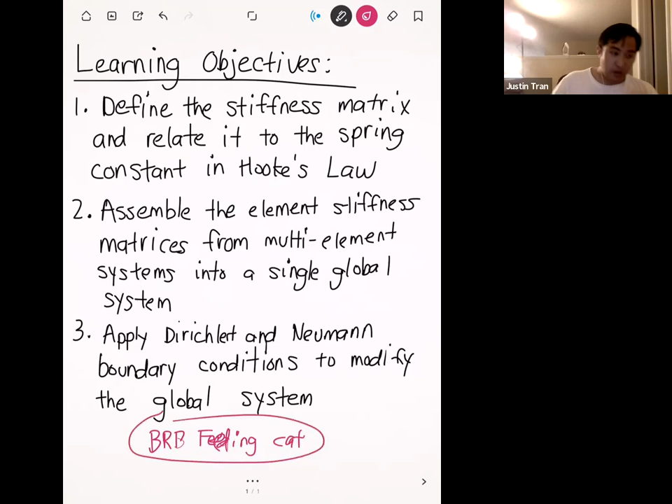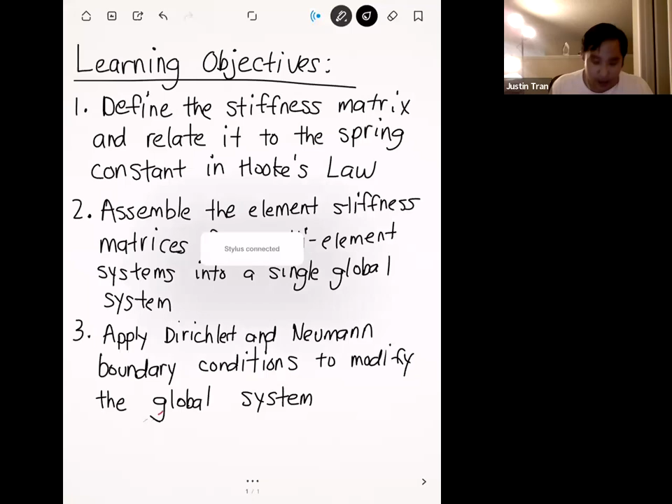All right, let's go ahead and get started. The topic for today's lecture, which is going to be the broader topic for the next few weeks up until the first midterm, is the direct stiffness method.

Let me start by saying that what we know as the finite element method or finite element analysis, there are lots of different ways that you can implement that.

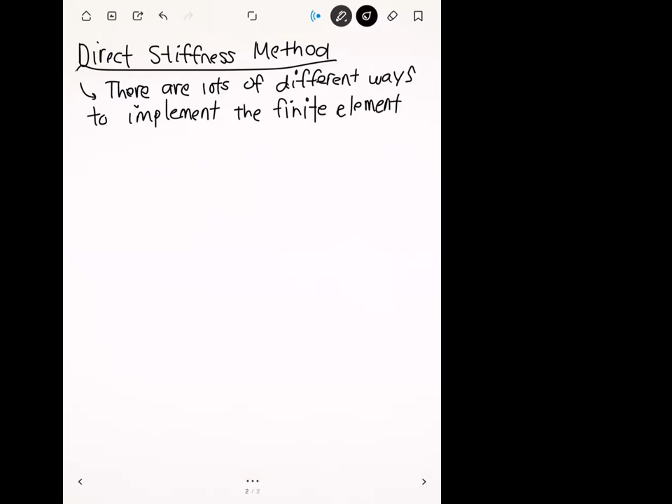If you can hear that, don't worry, my cat's not dying, she's just doing her post-dinner yowling. But she's fine, I'm not abusing my cat, I promise. That just makes it sound suspicious, Professor. Well, you're free to believe what you want. I'll bring her at the end of lecture, just because this will be the last time I'm at home, so probably the last time we'll get to see her, so I'll bring her at the end just to show you she's fine.

I think this fact is surprising to people, because when we think of the finite element method, you think it's just one method, but the finite element method actually refers to a lot of different methods to implement it. So it's more of an umbrella of methods, and we're going to talk about a few different ways to implement that. We're going to start with the direct stiffness method, which I think is a really good starting point, just because it's the most physically intuitive way to start this, and it illustrates a lot of key concepts I want to keep moving forward.

Okay, I will say though, I want to be upfront and honest with you guys that the direct stiffness method is not one that's actually used practically in a lot of codes. If you looked at the source code of ANSYS, you will see that there's no direct stiffness method in there. So it's not really a practical method in the way that it's used to actually solve practical problems. There's no commercial codes that implement direct stiffness, so it's more of an educational kind of method. But I like to start off with this in class because I think it illustrates a lot of key concepts, and it builds us up to some of the more sophisticated methods we're going to look at at the end of class.

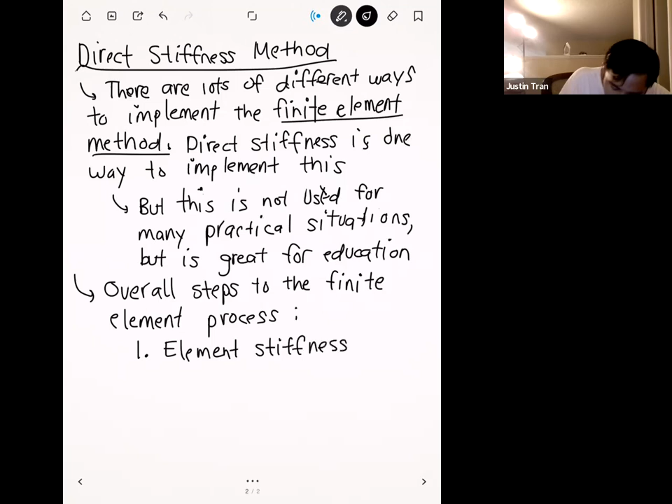There are three main steps I want you guys to focus on, and we're going to continue doing these three main steps even when we start to do some of the more complex math. Number one, the first step is to compute all the element stiffness matrices. I know none of this makes sense now, but it'll make sense later. I did want to list out the steps here because they are important. Step one is to compute all the element stiffness matrices.

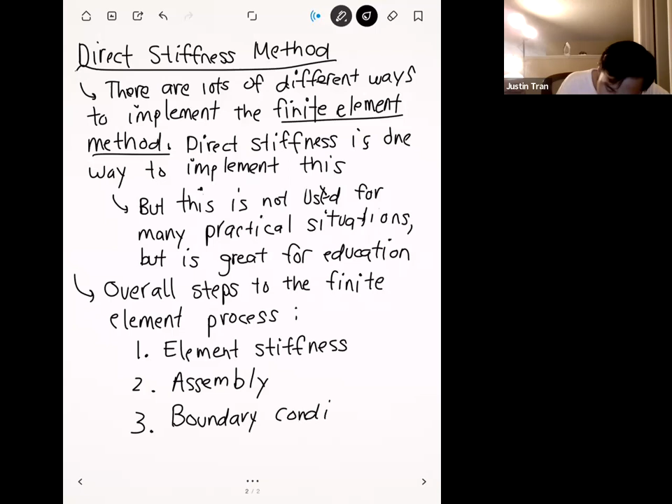Step two is a step called assembly, which we'll go over later today. Step three is to apply boundary conditions. And step four, which is kind of not really a step that we'll focus on too much, is the actual solution - how to solve that. So those are the four overall steps I want you guys to focus on from this unit, and I'll highlight what those steps are and what they all mean as we go throughout the lecture today. Any questions on this so far?

Okay, so let's start with the first step, which is the element stiffness matrix. For now, I'm just going to call it the stiffness matrix. To motivate what the stiffness matrix is, I'm going to pull in something from elementary physics. Hopefully you learned this from your first physics class, no matter how many years ago it was, but hopefully it should ring some bells. What I'm referring to here is Hooke's law for springs.

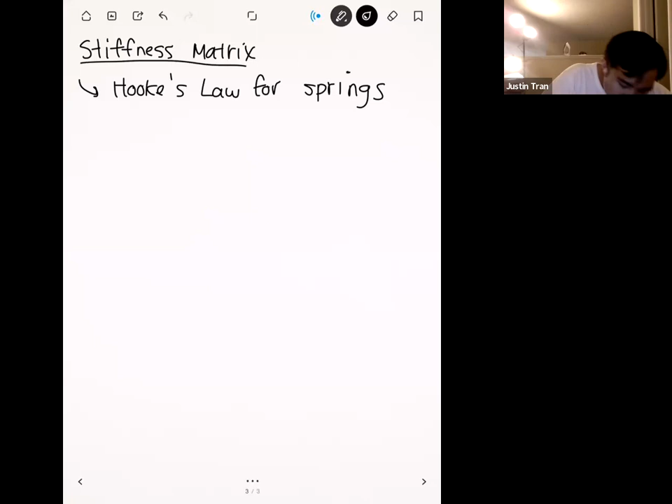All right, so what Hooke's law basically says is that if you have a spring, I'm going to attach the spring to a wall, and if you pull on the spring with a force F, that F characterizes how strongly we're pulling the spring. If the spring had an original length L, which is its resting length, we intuitively expect that when we pull on the spring with force F, it's going to lengthen by an amount we'll call D.

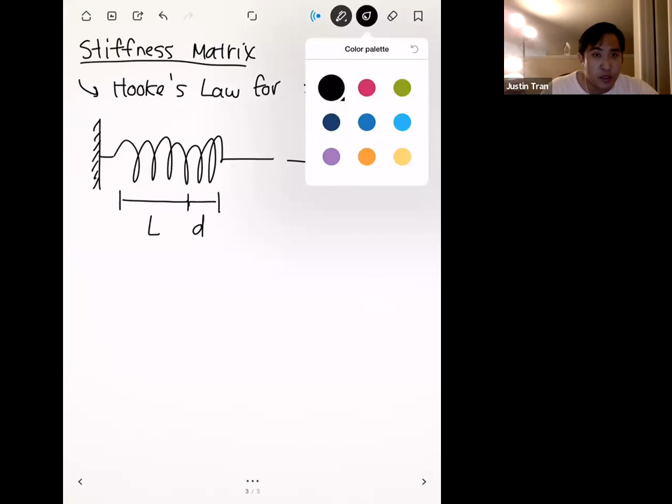So we can form a relationship between the applied force and the resulting deformation. What we say is that the applied force on a spring is equal to the resulting deformation modulated by a property of the spring itself. And if you recall from your physics classes, every spring has something called the spring constant K. So K is the spring constant, F is the applied force, and D is the displacement or deformation of the spring.

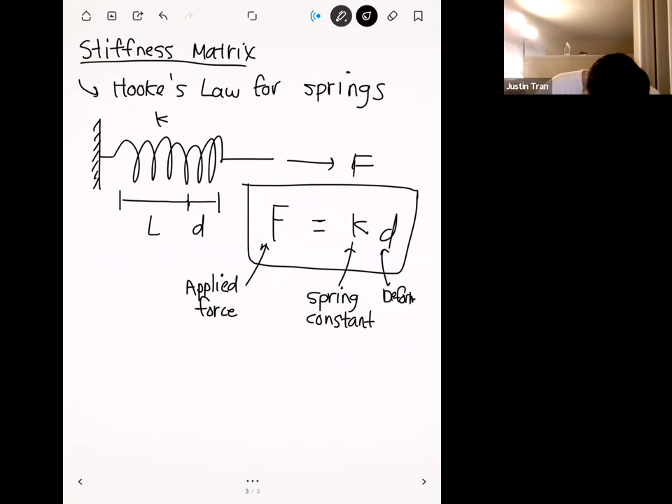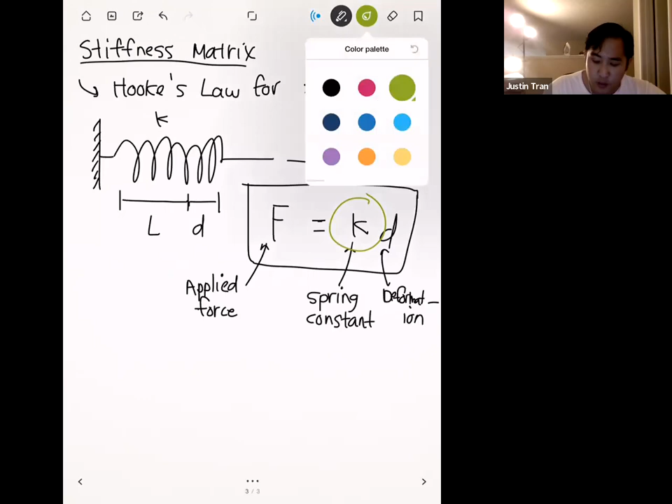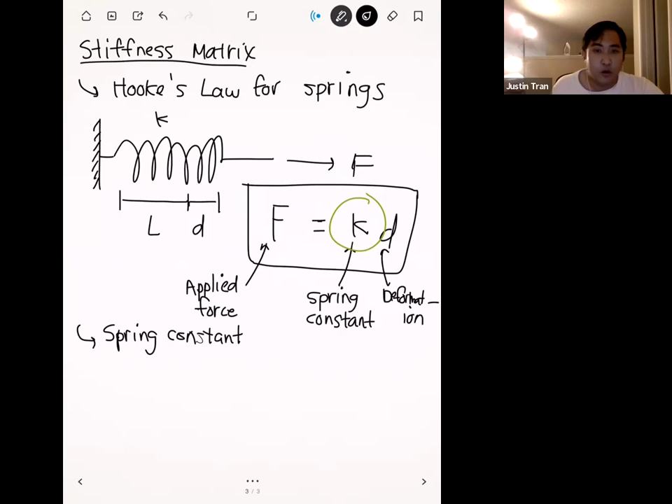Deformation, okay. So I want to talk about the role of the spring constant here, because that's kind of key to understanding what the role of the stiffness matrix is. In this very simple equation, the spring constant plays a very important role, acting as a proportionality constant, or you can think of it as a conversion constant that relates the applied force to the deformation.

So what the spring constant tells you is that for this particular spring, if you apply a certain amount of force, then it's going to give you this amount of deformation. Another thing I want to highlight about the spring constant is that it's an inherent property of the spring itself.

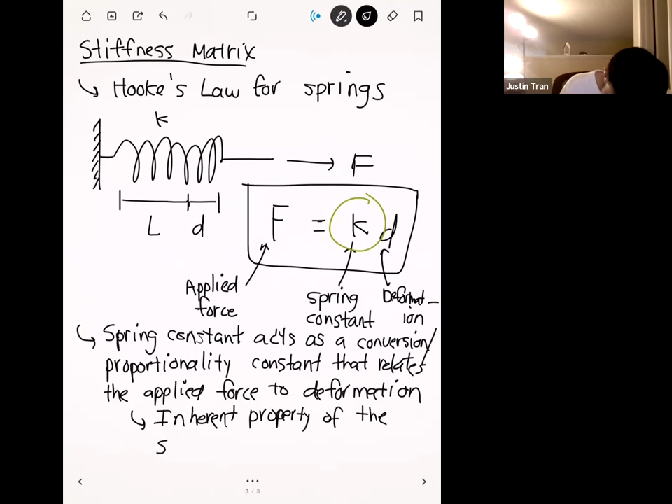The spring constant does not depend on any external factors. I know technically speaking something like the spring constant probably depends on temperature, so if you heat up the spring to a certain degree the spring constant is going to change, but we're going to neglect all that. We're going to assume the spring constant is inherent to the material and won't change. So if you ask the spring on Monday, on Thursday, when it's taking a bath, when it's just chilling on the deck, the spring constant is going to be the same because it's inherent to them. It's the spring constant is the spring constant.

So what this very simple formula tells us is that when you apply external forces to a physical system, the properties of that system that are inherent to it, the physical properties, the geometrical properties, are going to determine how that system responds or deforms in response to those external forces. I know it kind of feels like I'm making a big deal out of a very simple equation, but that understanding is going to be key to understanding what the stiffness matrix is, in terms of what role it plays for our finite element method. Any questions on this so far?

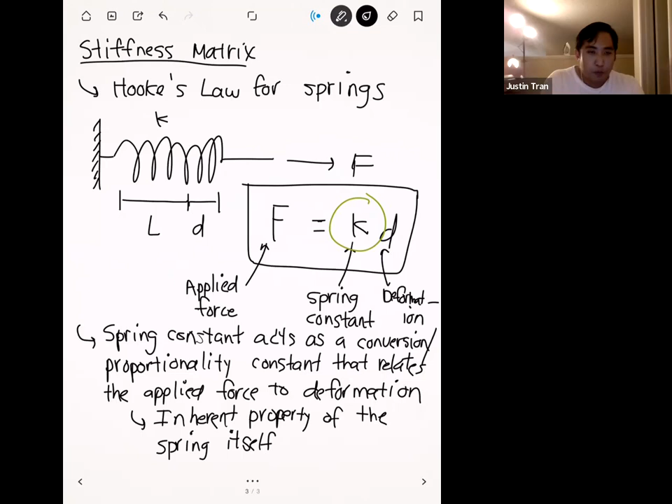All right, so that's Hooke's law for a spring that's attached to a wall. But let's generalize this a little bit. Instead of the spring being fixed to the wall on one side, let's change it so that both ends of the spring can deform.

Professor, so with this spring example, are you basically saying that our stiffness matrix is going to be the regulator between our force and our total deformation in the system of analysis that we're applying our conditions to? Yeah, no, that's kind of exactly where I'm going.

The stiffness matrix is basically going to play the role of that spring constant. In finite element world, we like to think a lot about what our external forces are, or what are some things we're applying, and we want to relate that to how the system is going to respond, things like the deformation and displacement. So the thing that actually relates those two is going to be the stiffness matrix. So yeah, that's kind of where we're going.

Okay, so let's generalize this. Instead of having just one end of the spring deforming, let's say we generalize it so both ends can deform. So here's our spring, and now we can grab both ends.

One end of the spring is going to deform by an amount D1, and the second end is going to deform with an amount D2. And to apply this deformation, we can apply forces. So let's say we have an applied force F1 on one side and applied force F2 on the other side.

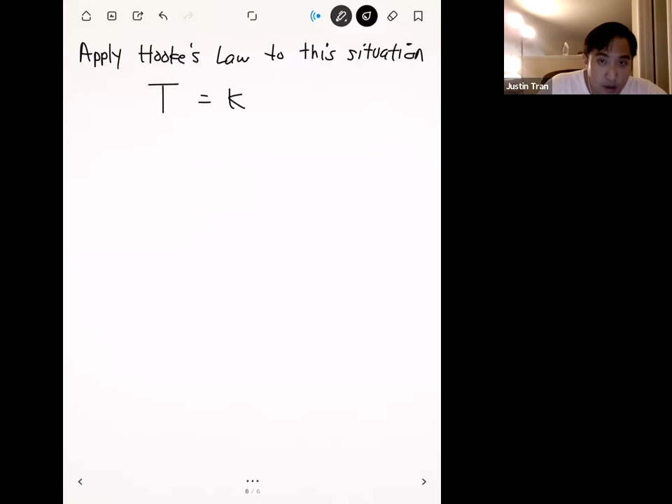If we take the situation right here, and we want to fill in the stiffness matrix, let's actually use what we know about springs. So let's apply Hooke's law to this static equilibrium situation. In this situation, even though we're applying a force T on both sides, we sum it up as just a single force T. This is equal to the spring constant multiplied by delta, where this delta right here is the total deformation of the spring. We can come up with another expression for this deformation based on the nodal deformations.

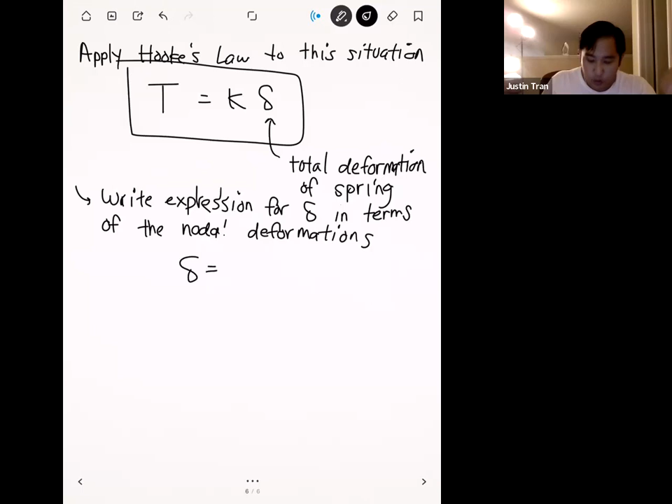Okay, so if we go back to the figure on the previous page, we can see that if we apply an equal and opposite tensile force T on both sides, then we're going to have D2 going to the right and D1 going to the left. And so the total deformation is just going to be the difference of the displacements of those nodal deformations.

So we basically have delta equal to D2 minus D1. Remember, D2 and D1 are a measure of how each of the two ends of the spring deform. So if we take their difference, that measures how much the spring is deforming overall.

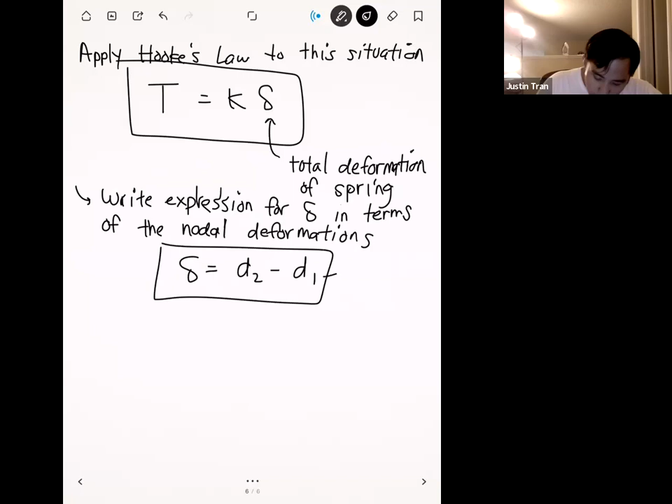All right, so let's plug this in over here. If we plug that in for delta, what we get is T is equal to K times D2 minus D1. So this is good. We've used Hooke's law, and we're able to incorporate D2 and D1 into our equations.

And so now let's use this equation to incorporate F1 and F2.

Remember, if we looked at our general stiffness system on the other page, it's a relationship between F1, F2, and D1, D2. We're about halfway there, so we have D1 and D2 in our equation, but we need to account for F1, F2.

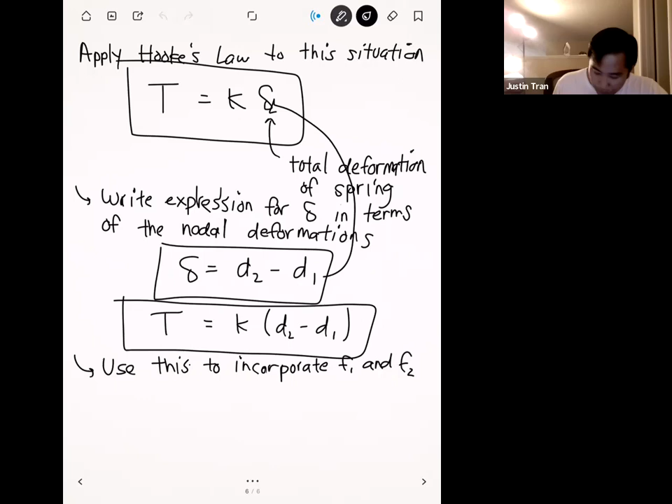To find how F1 and F2 are related, let's compare our two figures. In our general figure at the top of the page, F1 and F2 are applied on the two nodes of our spring, and they're applied to the right. If we compare that to the bottom, where we made the assumption of static equilibrium, we can see that F2 and T are exactly the same. F1 and T have the same magnitude but are in opposite directions. So the relationship is that F1 is equal to minus T, while F2 is equal to positive T, in order for these two diagrams to be equivalent.

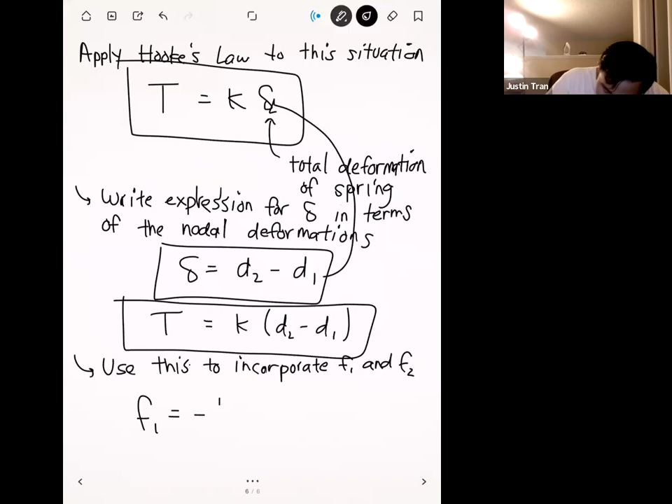So what we can say is that F1 is equal to minus T, and F2 is equal to positive T.

We're almost done with the derivation. The last step is that, now that we have these relationships, we want to eliminate T from these equations, because T doesn't appear in our stiffness system at all. To eliminate T, we just plug in this expression for T right here and right here. Then we'll have two equations: one relating F1 to D1 and D2, and another relating F2 to D1, D2. Those two equations are going to form the basis of our stiffness system for spring. Any questions on this?

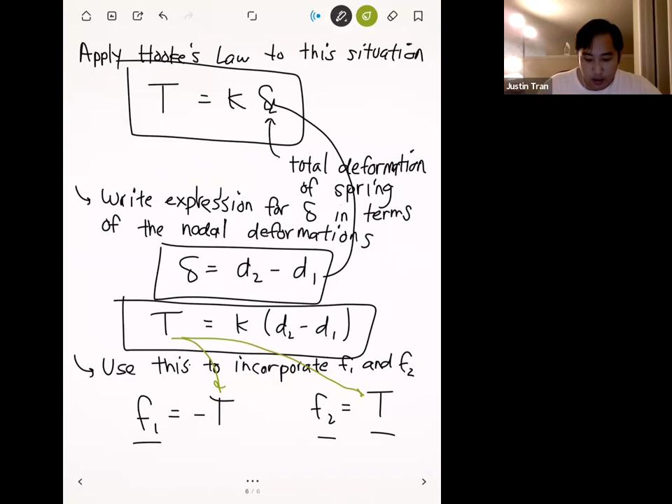Okay, let me finish up this derivation on the next page. If we plug in for T in those expressions, we have F1 is equal to minus K times D2 minus D1, and F2 is equal to K times D2 minus D1.

I'm going to manipulate the terms a little bit here just to make it easier to plug into the matrix. For F1, I'm going to distribute that negative throughout the parentheses, so if I distribute that negative K throughout the entire parentheses, what I get is K D1 minus K D2. And for F2, I'm going to just flip the terms so that D1 is in front, so we have minus K D1 plus K D2.

All right, so now that we have these two equations, all we have to do is put them in matrix form, and we'll see that it matches up with our stiffness system exactly.

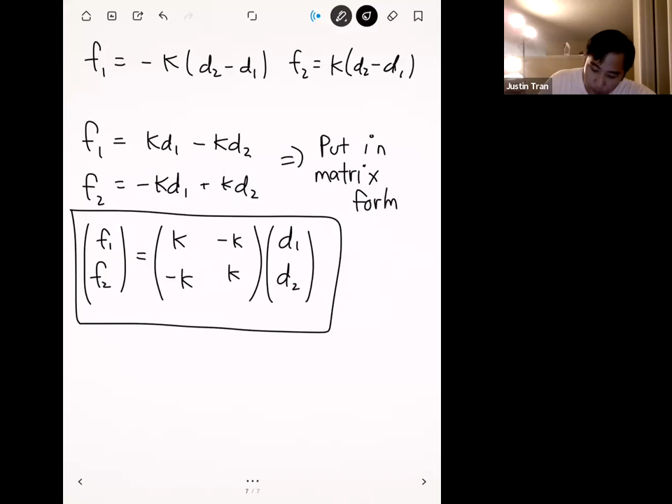If we just extract the stiffness matrix itself, then what we get is a matrix of K, minus K, minus K, K.

What the... Freaking app froze on me.

Oh my God, I'm sorry, everybody. Okay, there we go, okay.

All right, so we have k, minus k, minus k, k, right? This right here is the element stiffness matrix for a spring. You can see that the only property we've included here is k, just positive and negative versions of it.

But that makes sense, because remember, the element stiffness matrix, no matter what kind of problem you're doing, consists of purely inherent properties of the system itself—material, geometric properties, all that jazz. For a spring, there's really only one property it has, and that's the spring constant. So it makes sense that's the only contribution here to the stiffness matrix.

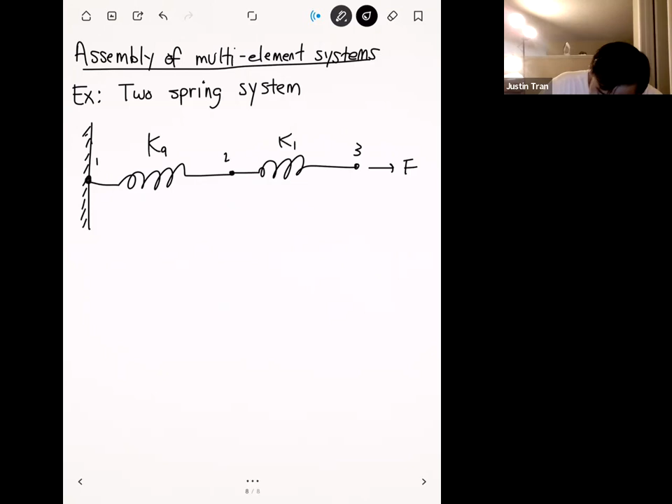Let's assume the first spring has a spring constant of K sub A, and the second spring has a spring constant of K sub B. What we're interested in is solving for the deformations, or displacements, of each of the nodes in the mesh.

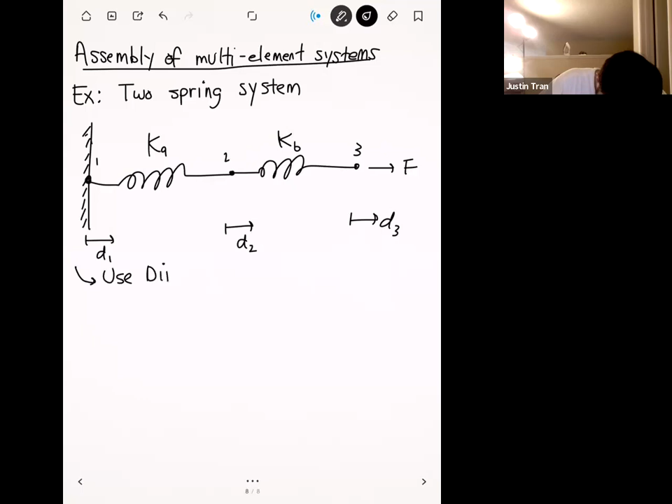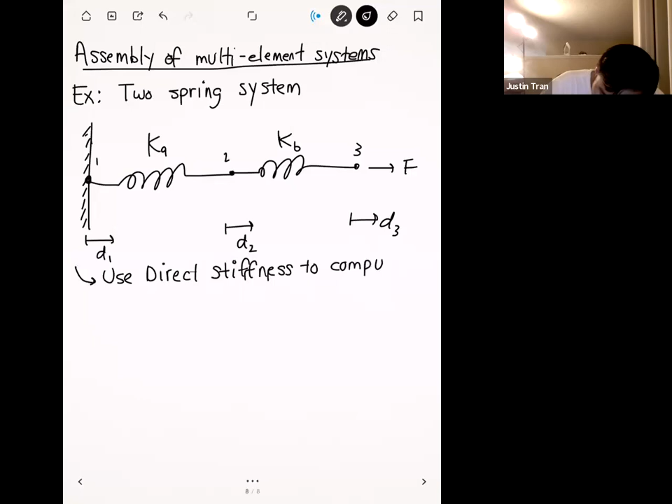The actual problem statement for this example is to use the direct stiffness method to compute all of the nodal displacements in the system. We also have, in addition to this, F1, F2, F3—all the nodal forces. So the first step in this process is to actually use the element stiffness matrix for each of the springs.

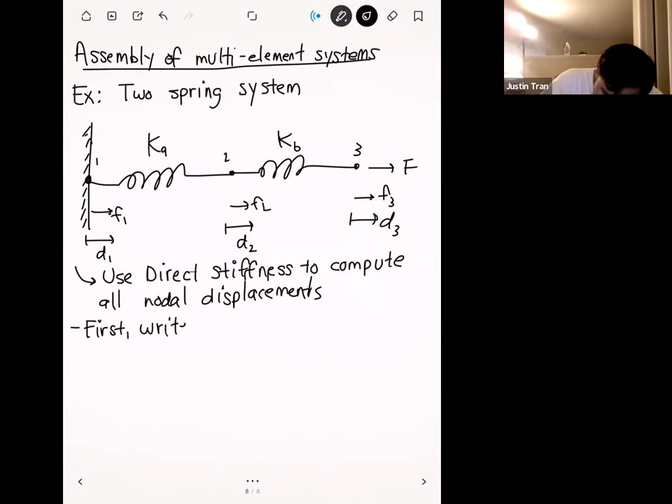Okay, so for spring A, we know that spring A has a spring constant of K sub A. Let's go ahead and write that out. Actually, we're going to write out the full stiffness system. The left node for spring A is node 1, and the right node for spring A is node 2. And so we're going to relate this.

F1, F2 is equal to Ka, minus Ka, minus Ka, Ka. And those are the spring constants for spring A. They're going to be acting on the displacements D1 and D2.

And then for spring B, we can write out a similar system, but we can see here that spring B is acting on nodes 2 and 3, so we have to make that adjustment into our stiffness system. Spring B is going to be operating on F2, F3. The stiffness matrix is still KB, minus KB, minus KB, KB. And this is going to be multiplied by the response of element B, so that's going to be D2, D3.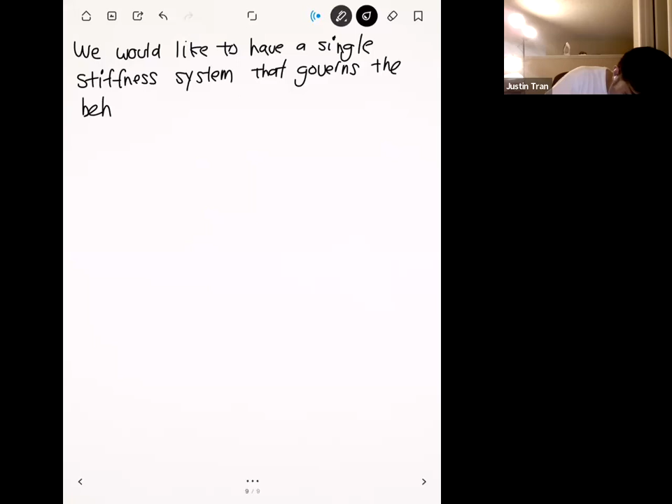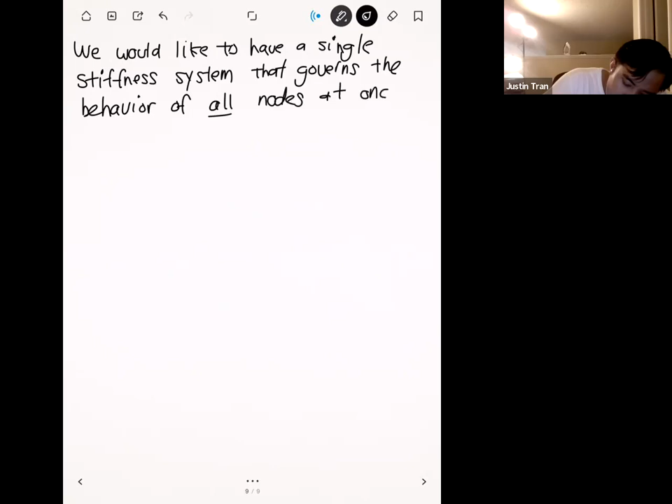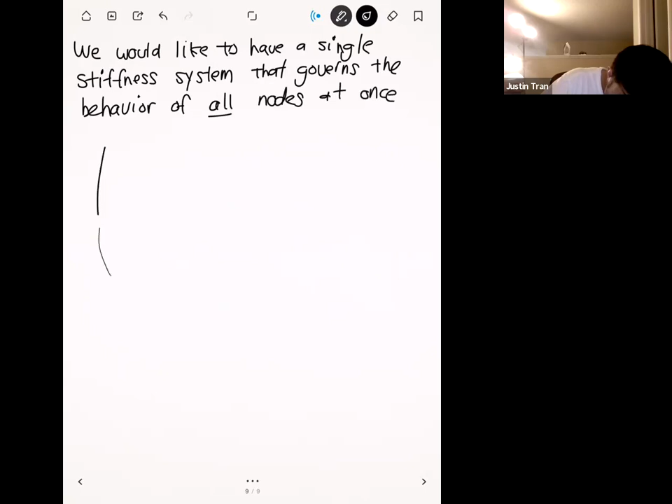Or in other words, we would like a system like this, where we have 3 nodes in our system, and so we're going to have 3 equations. We want just one, and I'll call it the global system, a global stiffness system that we can solve for all of the nodal behaviors at once.

This global system is going to take into account that certain nodes are going to have interactions with multiple elements at once, which is something our isolated elemental systems don't capture on their own. So now the question is, how are we going to assemble this global system? Do we have to go through a whole derivation for a 2-element system just to get that case, and do we have to come up with a new derivation each time we have a different number of springs for different systems? The good part is, we don't have to do that.

The way we're going to assemble the system is to take all of the elemental contributions, in other words all the elemental stiffness matrices, and just insert them into the proper spots in the global system.

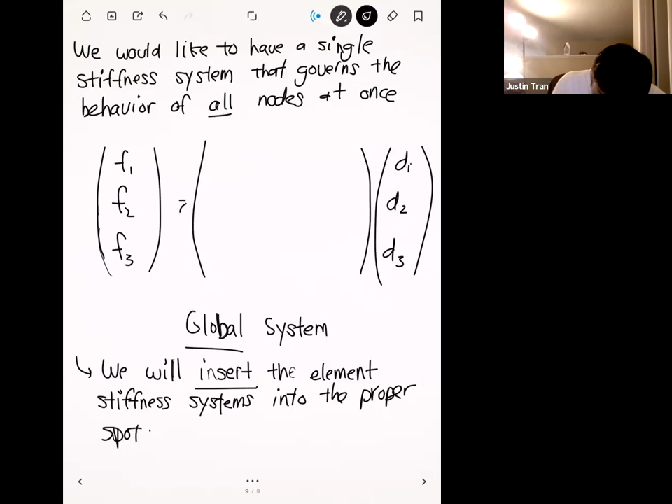This is where it's going to be key to make sure we know which nodes the elements act on. I have a very visual approach to showing this, but the textbook has more of a mathematical approach, and there's nothing wrong with that, I just think there's an easier way to show it. The way I like to think about it is this: we know our global stiffness system has 3 rows and 3 columns in this case, and the first row corresponds to D1, second row is D2, third row is D3.

We can also label the columns too, right? And so the columns also are labeled in the same way. And so we have D1 to D3, going from left to right, basically.

The elemental systems are inserted into the places which govern their... so the elemental systems are slotted into the locations on the global stiffness matrix that correspond to what degrees of freedom they act on.

So to put it plainly, let's take element A, for instance. Element A acts on nodes 1 and 2, right? And so that means that in the global system, element A's contributions are going to be in all the slots that govern D1 and D2.

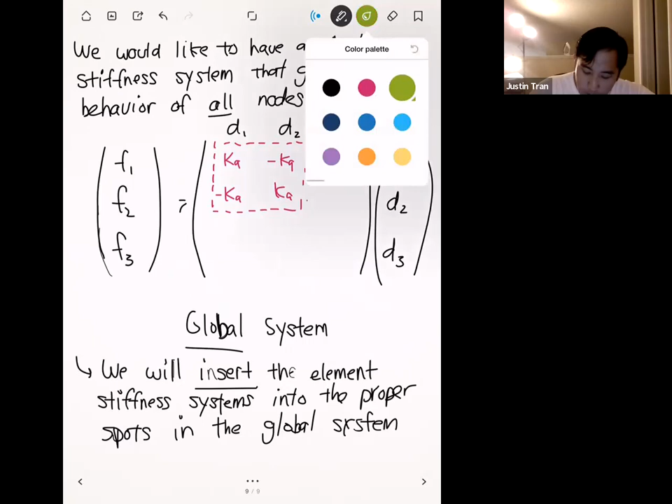Element B, on the other hand, we know acts on nodes 2 and 3. And so we're going to slot element B into the 2, 3 slots in our global system. And so where are the 2, 3 slots? We can see that 2 and 3 are the second and third columns and the second and third rows, so they're going to intersect at those 2, 3 spots.

And so if we can draw another box around this, just like that. And this is where we're going to slot in element B stuff, right? So we have minus KB, and then positive KB.

In the spot where it overlaps with another element, all we have to do is just simply add their values together. And so in that middle spot in the matrix right there, we have KA plus KB. And so that's to basically represent the fact that node number 2 is being acted on by elements A and B, so its effective stiffness is kind of a combination of those two.

And then everywhere else that we don't have anything, that's not encompassed by an element stiffness matrix, we're going to put a 0. And so that's the process of assembly, basically. After you form all the element stiffness matrices, all you have to do is slot them into the appropriate slots in the global system, and then you have an assembled finite element system.

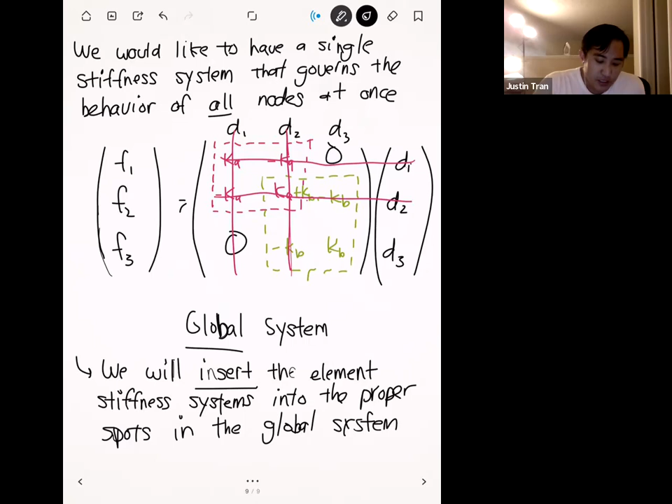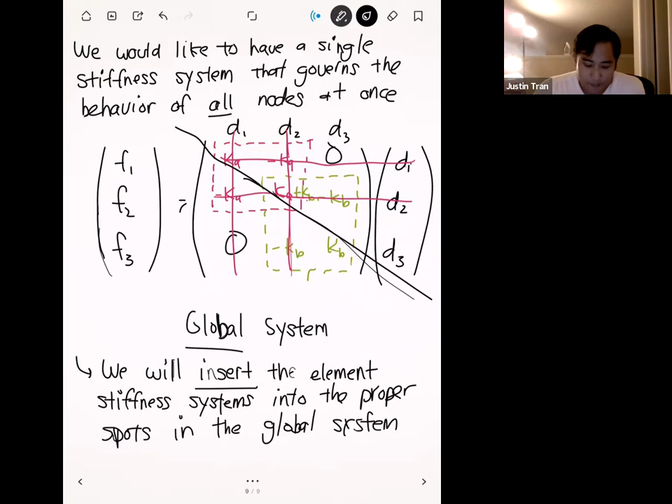And the reason it's undefined is that this matrix is actually singular, and you can't use a singular matrix for a system of linear equations. So what do we do here? We're going to need to modify the system a little bit before we can actually solve it, and the way that we modify the system is through the application of boundary conditions. That's going to be the next stage in the process.

So what are boundary conditions? Boundary conditions are basically all the external effects that are acting on your physical system.

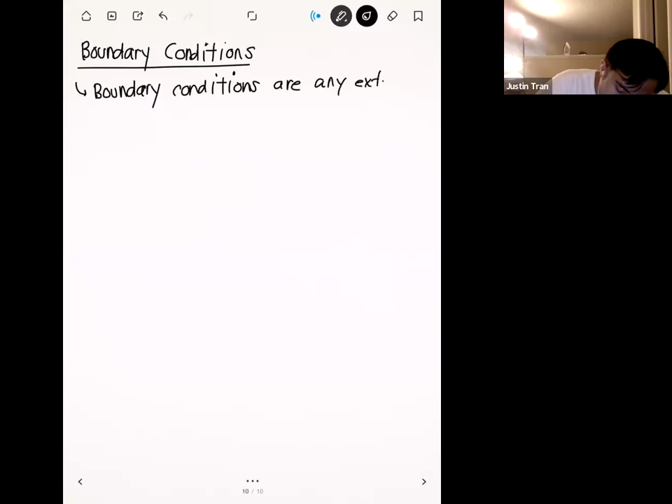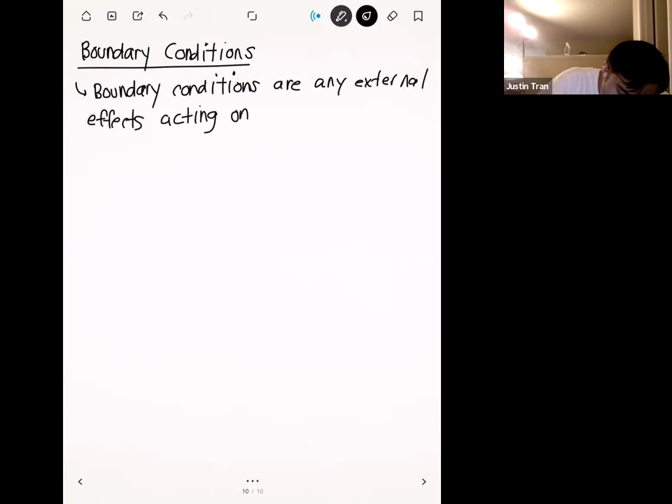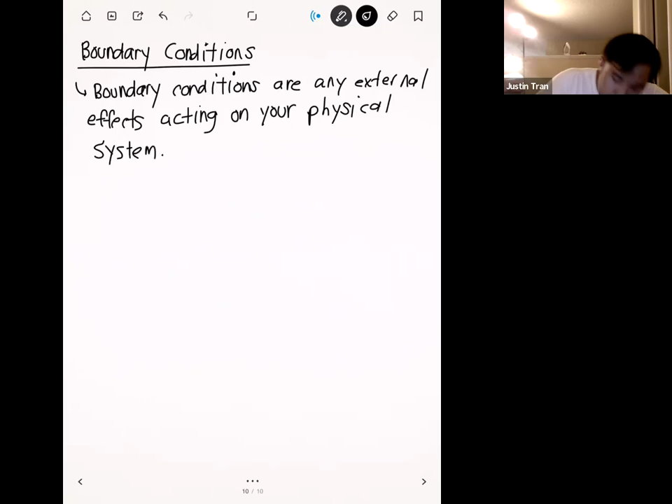Okay, so some examples of external effects are things like constraints, right? Any external effect that's going to constrain motion, or any kind of external forces or external loads, those count as boundary conditions. Any kind of effect that's external from the system itself that's going to affect its behavior.

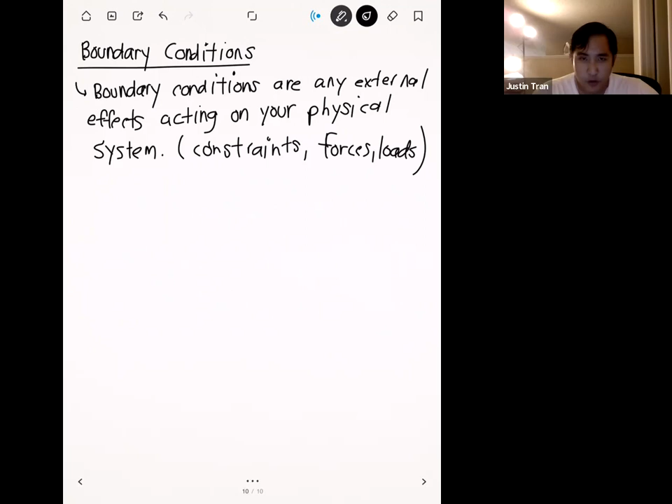If you're coming from 540, I think we use the terms loads and constraints a lot. But for this class, I'm going to use their kind of classical, mathematical definitions. There are two types of boundary conditions that we can use in finite elements.

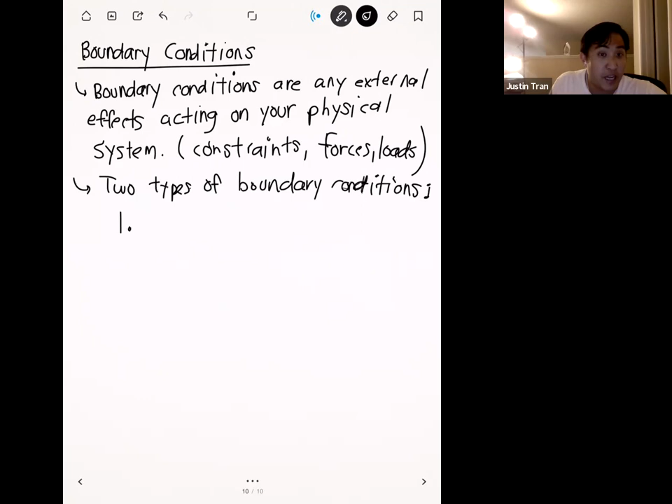The first type of boundary condition is known as a Dirichlet boundary condition, probably named after the dude that formalized the theory. A Dirichlet boundary condition, the way we describe it, is that it directly specifies the value of the solution variable at a certain location.

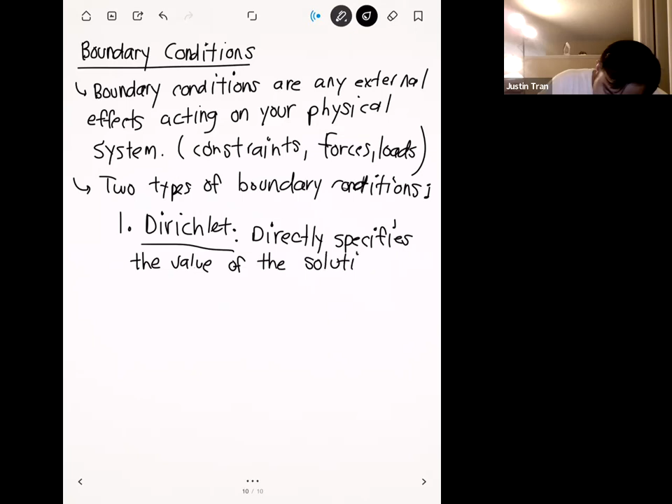For our case, where most of the time we're going to be focusing on, at least for this first portion of the class, on structural finite elements, our primary solution variable is displacement. So any kind of condition that directly specifies the value of the displacement counts as a Dirichlet boundary condition.

The second type of boundary condition is called a Neumann boundary condition, again probably named after the dude that formalized the theory. I didn't choose these names - I know they're hard to remember, but I guess we have to give the scientists credit. Neumann boundary conditions, speaking generally, are comprised of any kind of external forcing effects.

I put forcing in quotations because Neumann boundary conditions can be a lot of different things. Neumann boundary conditions are basically effects that don't directly specify the solution variables.

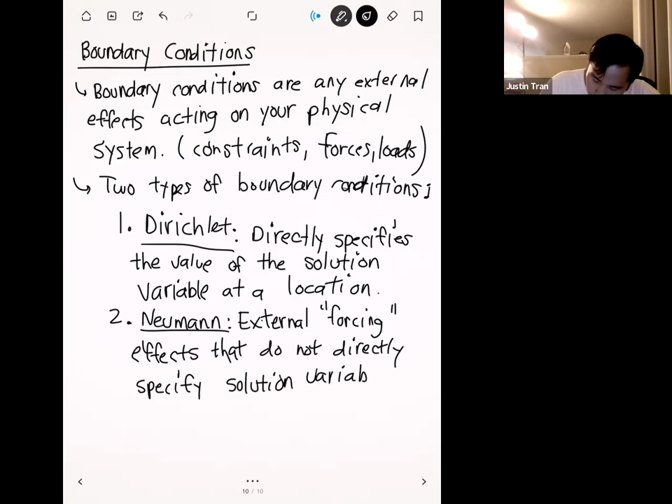One very common Neumann boundary condition that we'll see is like an applied force, right? If you apply a force to an object, a lot of times it's not immediately clear how much it's going to displace or deform. If you take a pen and apply a force and try to bend it, it's not apparently clear the relationship between how much force you apply and how much it's actually going to displace. So the force in this case would be characterized as a Neumann boundary condition.

The reason I'm making this distinction is that the way we actually treat them mathematically is going to be different. First we're going to go over how we treat Dirichlet boundary conditions - I'll show you what to look out for and how they're actually depicted in a problem like this, and how to account for that in the global system. Then we'll do the same for the Neumann boundary condition. But before I do that, are there any questions on this?

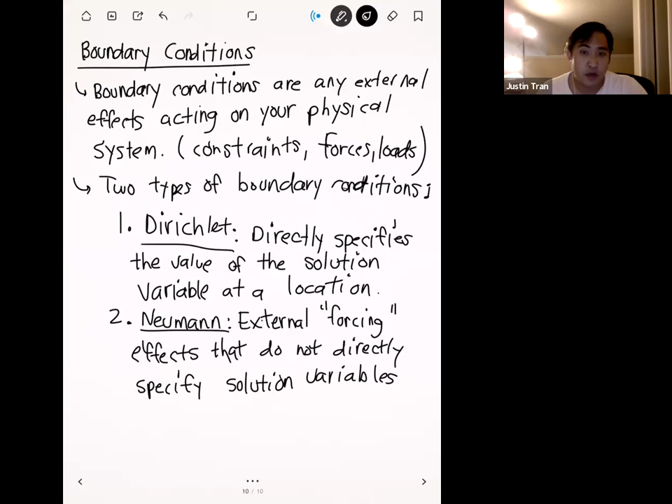Okay, all right, so let's return back to our example and look at the original diagram we had for this problem. In the original problem, we had something that looks like this - this node right here is node 1 that's attached to the wall, and we had nodes 2 and 3, and of course we have KA, KB. Let me focus on node 1 first, right?

So node 1 is fixed to the wall, right? And if something is fixed, we basically say it's not going to be deforming at all. So we can conclude already from the beginning that the displacement at node 1 is going to be 0, because it's fixed to the wall.

Or in other words, mathematically, we can just do this: D1 is equal to 0. And since we're directly specifying the value of the displacement at this node, just based on its condition, we can conclude already that this is a Dirichlet boundary condition, because again, it's a direct specification of what that displacement should be.

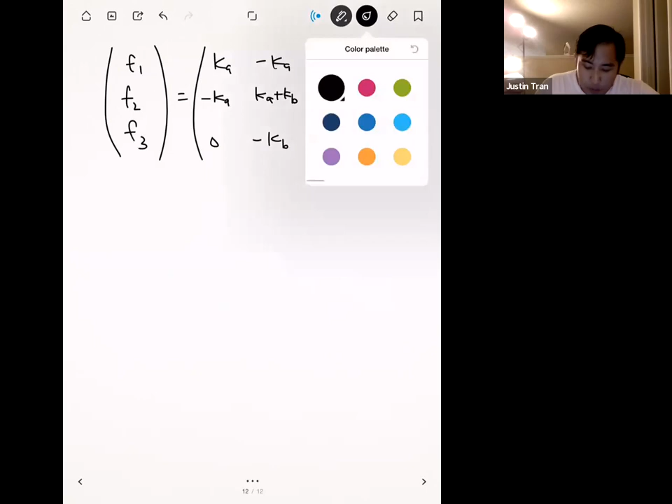So this is our original system. But we just got done saying that, because there's a Dirichlet boundary condition applied on node 1, let's look at the row that corresponds to row 1 right here. Now let's actually replace this with our Dirichlet boundary condition. Let's look at our Dirichlet boundary condition again—you can see that the coefficients for the first row are going to be 1, 0, 0, and then on the other side of the equation we have another 0.

So let's go ahead and replace that. Instead of Ka and minus Ka here, instead what I have is 1, 0, and there's already a 0 there, but let me write over it just for completeness. And then instead of F1, we're just going to put a 0 there. This replacement of the equation is basically our way to implement that Dirichlet boundary condition. Any questions about how I did that replacement? All right, so that's Dirichlet boundary conditions, and thankfully that's actually the more difficult one to do.

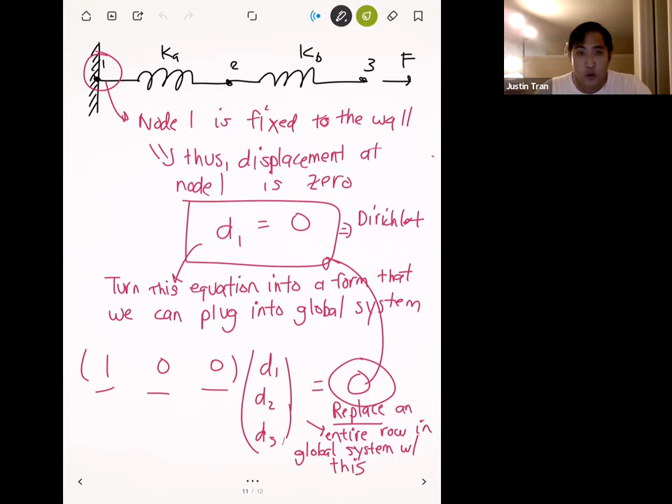Now let's look at the Neumann boundary condition. Remember, Neumann boundary conditions correspond to any kind of external forcing we're applying on this system. In this example, we only have one instance where we're applying external forcing, and that's on node 3. You can see we're applying an external force of F there. So the way we apply this Neumann boundary condition is to say we're applying a force F on node 3, and so let's just say that F3 is equal to big F.

That's it. We can see here in this system we have an F3 right here, so let's just replace that value with big F. And thankfully, that's all you basically have to do. The last thing to do before we solve it is recognize that on node 2, we don't have any Dirichlet boundary condition and we don't have any external force, so all we have to do is write a 0 in for that. After you apply those boundary conditions, our system is ready to solve.

Okay, so we have 3 equations and 3 unknowns, although technically one of the unknowns is really easy because D1 just equals 0. So in principle, we have 2 equations and 2 unknowns. Because this is a relatively simple example, you can probably do this one by hand, and it's not going to be too much trouble.

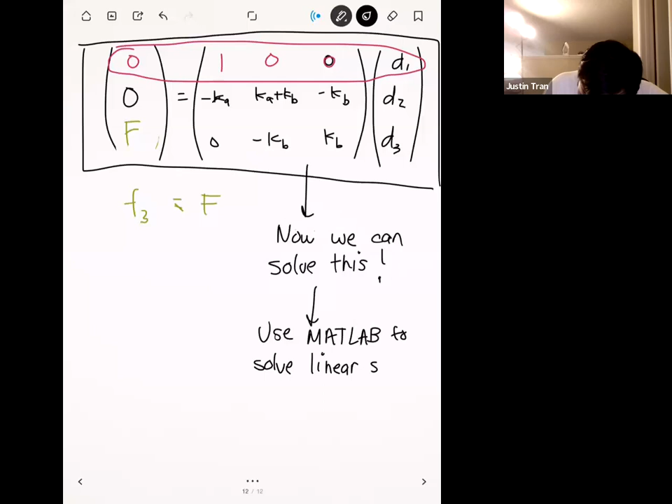Later on, we'll have global systems that are like 6 by 6, 9 by 9, sometimes 24 by 24. I'm not going to stop you—if you really enjoy solving linear systems of equations, all power to you. I'm not into that stuff personally, so I don't partake. But if you want to solve those systems, go for it. I think the easier way is to just punch it into MATLAB and let it solve it for you, because it's going to be a million times faster.

All right, so that's the whole process. Today we went through the entire finite element process: element stiffness matrix, assembly, boundary conditions, and then once you apply the boundary conditions, you can solve in MATLAB.

We're just about out of time today, but I do have one more example. When we start class on Monday, I'll go ahead and do that example, which shows you this entire process again, but for a more complex case than just 2 springs connected to each other. We'll see how that goes. Then from there, we're going to hop on to truss equations. Any questions on any of this before we wrap it up for the week?

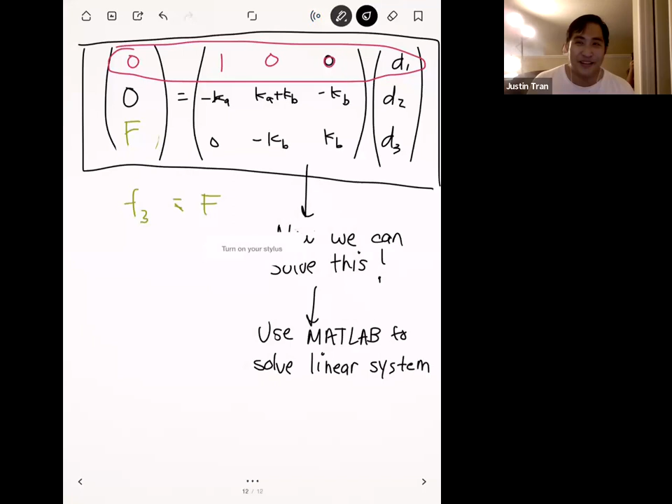Have a good one, Dr. Tran. Happy belated Lunar New Year. Oh yes, thank you, thank you. Did you guys want to see my cat? I promised I would show you, just to prove to you. All right, let me get her. Here she is—this is Angel Meow Meow, perfectly happy, although she probably wants to get down—she's pissed off that you picked her up. Have you seen that documentary, Don't Fuck with Cats? I disturbed her nap. Usually after she eats, she likes to yell a little bit and then she likes to sleep. Have you seen the documentary, Don't Fuck with Cats? No, I haven't, but it sounds like I should. You should watch it, it's pretty crazy. All right, say bye, Angel—it's the last time you'll ever see them. Bye.